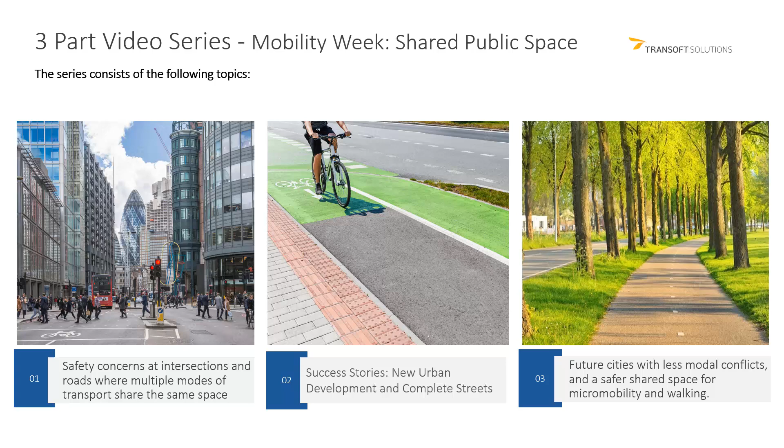During this video, you will learn more about the design principles for new futuristic imagined cities, mobility, and the concept of modal segregation versus modal mix. I'm going to show you some design concepts and actual implementations for future cities, then quickly go into software to support safety, flight paths, swept path analysis, landscaping, and many more in support of our future megacities.

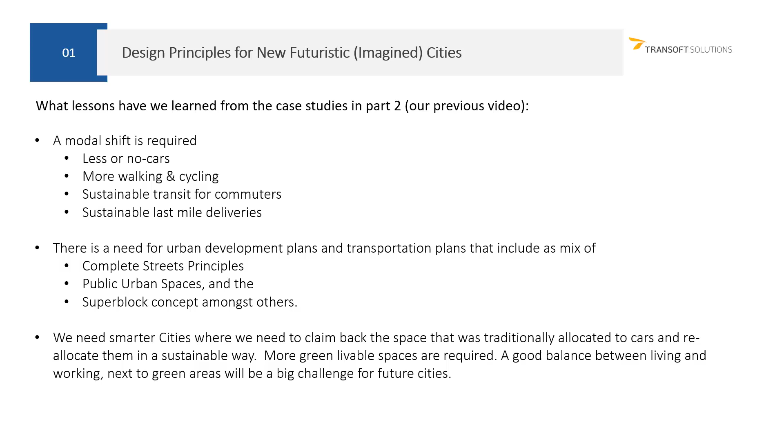We need smarter cities, and we need to claim back the space that was traditionally allocated to cars and reallocate it in a more sustainable way. Therefore, we need more green, livable spaces. There must be a good balance between living, working, and playing next to green areas, and this will be a big challenge for future cities to implement correctly.

Considerations for new cities include creating sustainable design with mixed use and many activities. We should use materials that minimize our impact on the environment, and we must create buildings and spaces that support live, work, play in a safe environment.

We must design for people first. There must be inclusion and access for all. Design should be people-centric for those who live, work, and play in the urban environment. More walkable and cycling areas promote a healthier lifestyle and reduce the overall carbon footprint.

Scalable urban density is required. This is a scaled approach to urban density. It is required to bring back living spaces to the city. Living spaces can be at the ground level, but also at higher levels of buildings and places. A balance can be found between tall and medium-sized buildings, allowing for a layered work and living space environment.

We must reclaim existing spaces allocated to cars and create public open spaces. This can be introduced through the concept of mixed public open spaces and superblocks, or even squares and courtyards. These spaces should be able to adapt to the changing needs of the users.

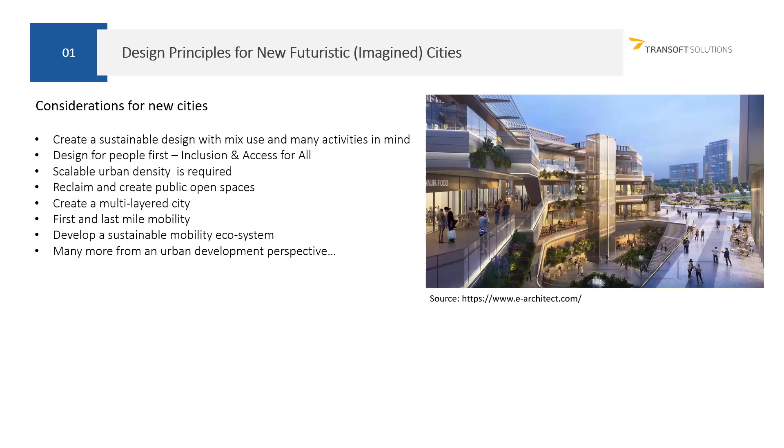We must develop a sustainable mobility ecosystem for all. There are many more urban development and traffic engineering perspectives that go hand in hand with this, and over the years, many more will be developed and integrated into our megacities of the future.

Future modes of transport definitely include walking and cycling, e-bikes, e-scooters, e-skateboards, mopeds, self-balanced unicycles, hoverboards, and obviously autonomous vehicles, very light rail — lower capacity rail on tracks that are very quick and easy to install — autonomous rail, rapid transit, and then autonomous and trackless trams.

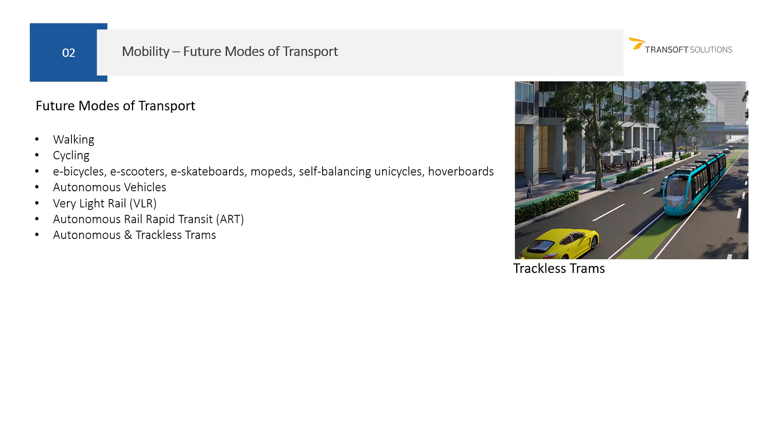Now, these trackless trams are more comfortable than buses. They are very easy to install in existing environments, and they are fast and convenient to use.

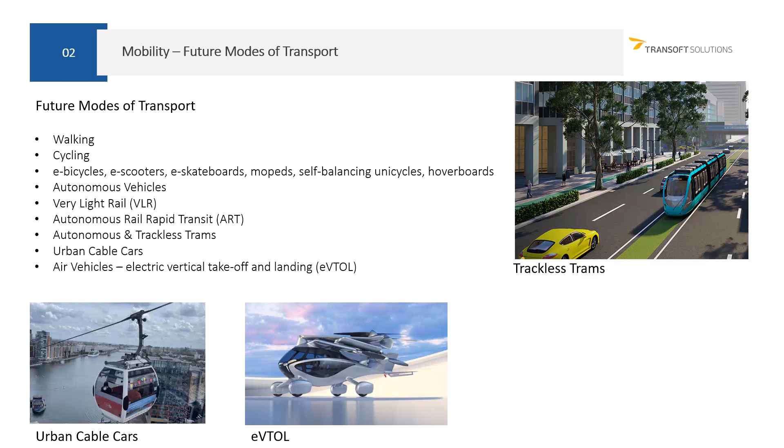Urban cable cars, I've seen quite a number of them lately. Air vehicles definitely, electric vertical takeoff and landing, which is the eVTOL, and we've seen tests of those. The big one I'm hoping for is drone buses. Future cities could have some of the following characteristics, amongst others.

Walking only areas, and when I say walking only areas, I'm talking about places to sit down and gather too. Typically, what we're talking about here is our public open spaces.

Mixed low speed micro mobility and walking together. Higher speed micro mobility with dedicated lanes, and there could be combinations of this. Separated, protected high speed transit, meaning rail, trams, and buses. Air transport, low and high capacity. And then there must be mobility hubs for mode interchanges, where air transport links to rail, tram, bus, people walking, cycling, and using micromobility.

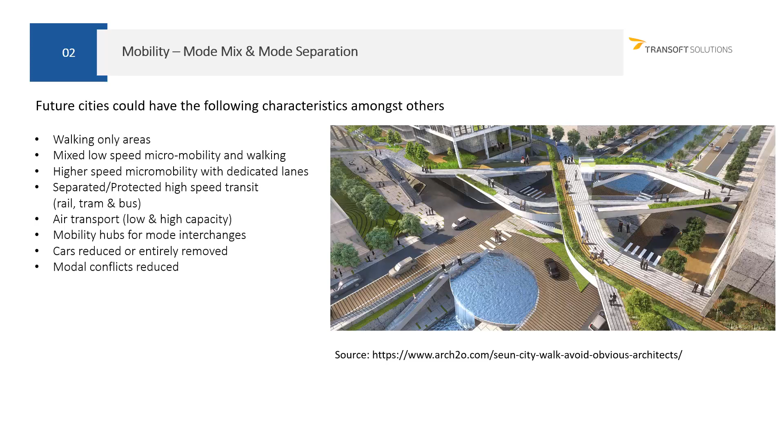Cars must be reduced or entirely removed. Modal conflicts will be reduced, especially if you look at, in some cases, implementing level separation. I'll show you some pictures of this later.

So, a futuristic cities example: Paris. This design was commissioned in the wake of the Climate Energy Plan of Paris. It represented 8 prototypes of towers that integrate elements of nature and technology, rainwater retention tanks, and green walls. By bringing in green spaces and farm life into cities, like on the right-hand side, and integrating community resources, this city project aims to bring greenery back into the city and provide sources of renewable energy.

Walking, cycling, and micromobility will be promoted, and for longer distances, high-speed transit like bus, trains, and rail will be used. You can see some of that in the picture on the right, along with some futuristic vehicles.

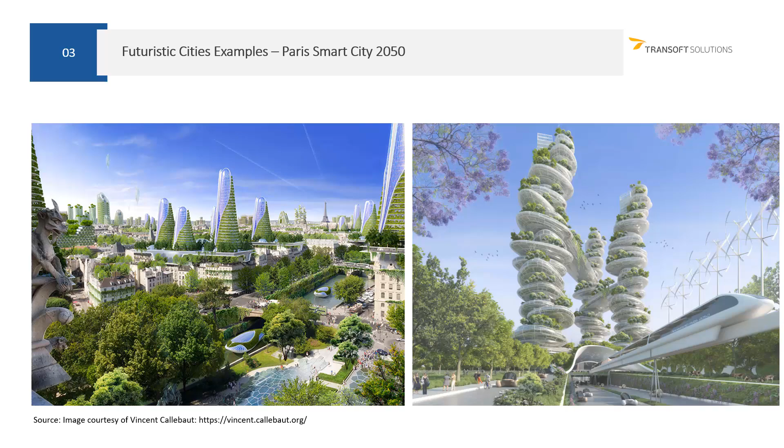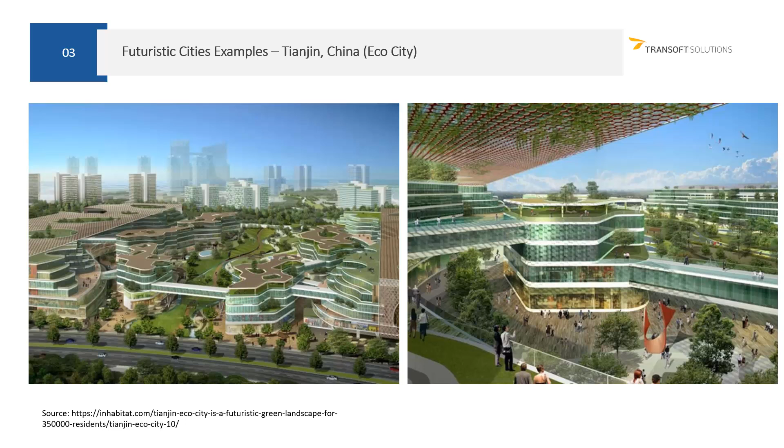So just to quickly show you some of the technology that could assist you with your current and future cities and megacity designs: designing safer walking and micromobility routes, public shared spaces and landscapes, and air transport.

For civil and transportation, we have AutoTurn, which does swept path analysis of vehicle movements. And then we have ParkCAD, which can be used to design those special bays for new air transport vehicles, whether for existing or new parking facilities.

GuideSign gives us, as the user, the capability to design wayfinding signs for shared spaces and other routes on various levels of our current and future multi-layer megacities.

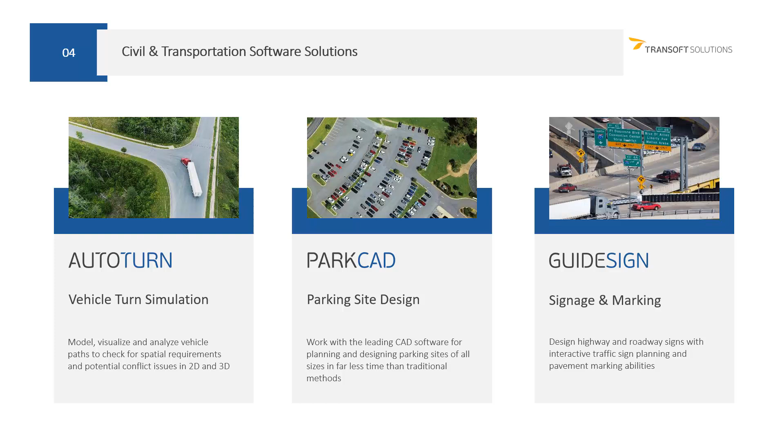Keyscape is currently used for landscape architecture design, and I can see that this will be used in our future designs. Keyscape will be ideal to place the correct mixture of plants along the new pedestrianized walkways.

The improvements in infrastructure changes can be monitored with Key Accident, where we monitor before and after changes, looking at accidents and incidents. Key Accident and Keyscape are currently UK-based products, and especially with London becoming a megacity, this will be very important. And again, Key Sign is used to do signage.

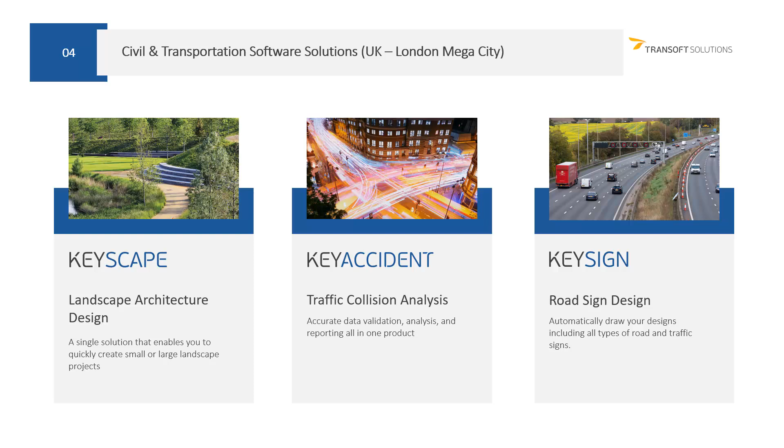Then on the safety side, there's TrafxSafe, for proactive road safety. We do this with AI video analytics, where we identify conflicts and near misses, analyze the current state, and propose mitigating measures. With TrafxSafe you can do before and after studies, and TrafxSafe Connect is a real-time system for monitoring dangerous intersections.

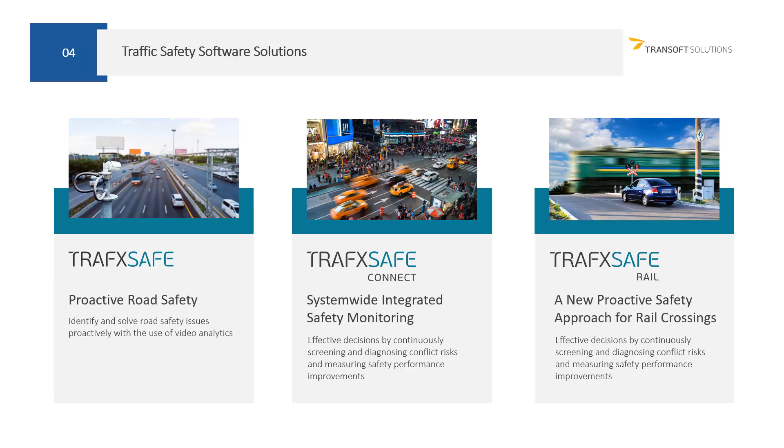TrafxSafe Rail will play a crucial part in monitoring road user compliance and risk through the different stages of a rail crossing. And then on the aviation side, AirTop, in the future where standard airplanes, helicopters, drone buses, and smaller electrical drones will be used for travel, it will be important to plan the airway carefully and to monitor it.

Not only will it be used for traditional long airplane flights, but for shorter trips by drones, drone buses, and other cargo delivery air vehicles. It is a comprehensive suite of tools designed to model, simulate, and visualize airport and air traffic operations.

AviPLAN is advanced aircraft maneuver simulations, including aircraft pushback operations, used at modal interchanges or at airports. And Aero Central is a software as a service, a SaaS platform, for sharing key airside and operational information in one easy, accessible, and centralized system.

It involves stand guides and specifications, allowing airports, airlines, and ground service providers to present and access various aircraft parking stand configurations, equipment locations, turnaround procedures, and aircraft technical specifications to support safer and more efficient decision making.

Now imagine all of this coming together in a megacity where you have multiple modes of transport and you have to manage that in a safe environment. This will definitely assist future cities and our current cities to have safer airspaces.